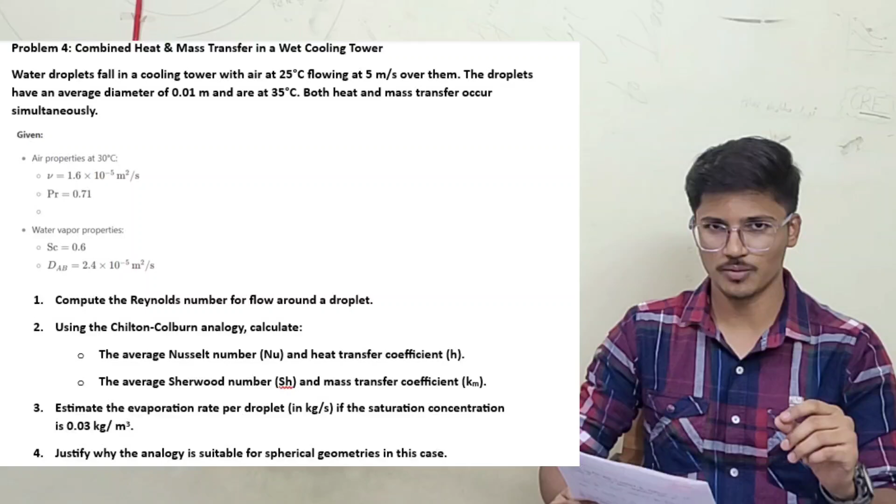So we'll go to part C. In part C, we need to estimate the evaporation rate per droplet. Unit is given to be kg per second, if saturation concentration is 0.03 kg per meter cube. So saturation concentration is given. So the last part of the question is we need to justify why the analogy is suitable for spherical geometries in this case. So these are the four parts which we need to calculate.

So let's look into the solution of the given problem. In this problem, we have to find Reynolds number for flow around a droplet. In the second part, we need to use Chilton-Colburn analogy and calculate average Nusselt number and heat transfer coefficient. Also, we need to find average Sherwood number and mass transfer coefficient. In the third part, we need to find the evaporation rate per droplet. The unit is kg per second and the saturation concentration is 0.03 kg per meter cube. And in the fourth, we need to justify why the analogy is suitable for spherical geometries in this case. So let's start from part 1.

In part 1, we need to compute the Reynolds number for flow around a droplet. So the given data for this part is air velocity, which is given as 5 meter per second. Droplet diameter is given to be 0.01 meter and kinematic viscosity is given to be 1.6 into 10 to the power minus 5 meter square per second. So you are now familiar with the Reynolds number and its formula. Reynolds number is given as U into D divided by kinematic viscosity. Substituting all the given values, we get Reynolds number to be 3125.

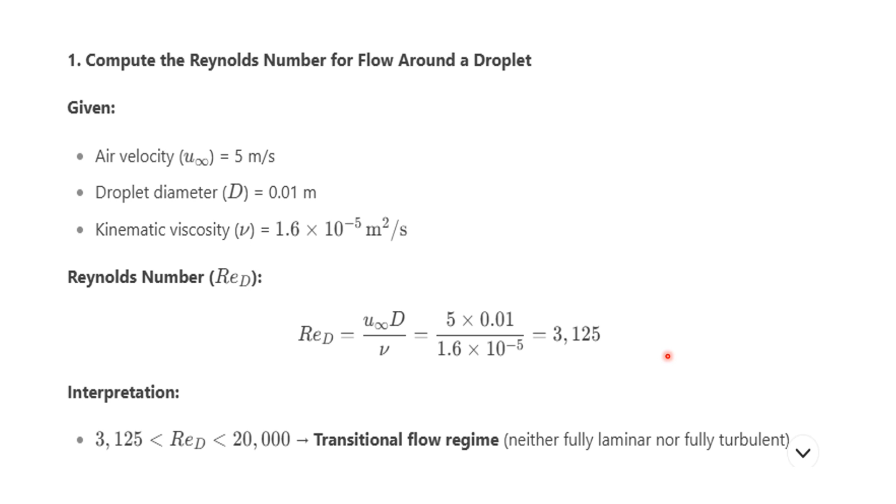Now, as the Reynolds number is between 3125 and 20,000, the flow will be transitional flow. That is, it will be neither fully laminar nor fully turbulent. This type of flow is called transitional flow regime. So this is basically an overall idea of part 1. So let's move to the next part.

In the next part, we need to calculate Nusselt number and heat transfer coefficient. So first of all, in this part, we need to use Chilton-Colburn analogy for heat transfer. You all are familiar as we have derived this formula. So the formula goes as Stanton number for heat transfer multiplied by Prandtl number to the power 2 by 3 is equal to f by 2. Here f is nothing but friction factor. Now we have introduced a new correlation, that is Ranz-Marshall correlation, and this is basically for spheres.

The formula is Nusselt number equals 2 plus 0.6 multiplied by Reynolds number to the power 1/2 multiplied by Prandtl number to the power 1/3. Now, Reynolds number we have found in part A. Prandtl number is given in the question, which is 0.71.

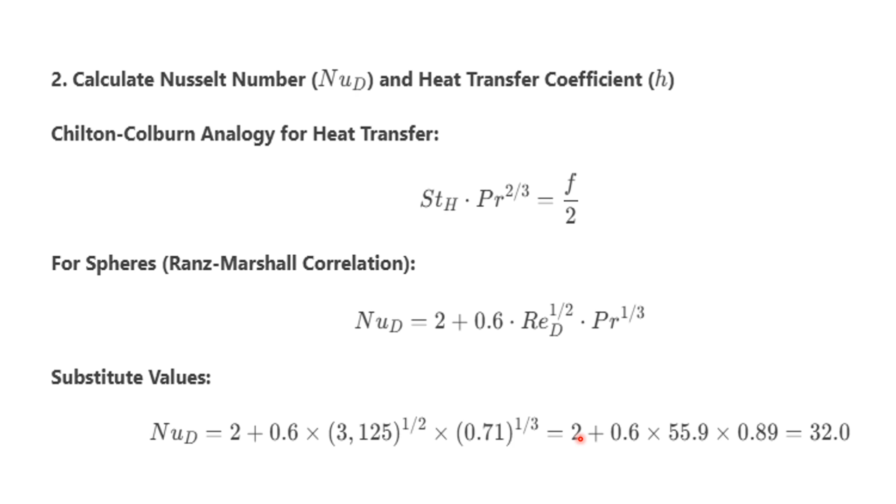So substituting all the values, we get Nusselt number as 2 plus 0.6 multiplied by 3125, that is Reynolds number, to the power 1/2, multiplied by Prandtl number, that is 0.71 to the power 1/3, which is equal to 2 plus 0.6 into 55.9 multiplied by 0.89. The final answer for Nusselt number comes out to be 32. So this is the solution for part 2.

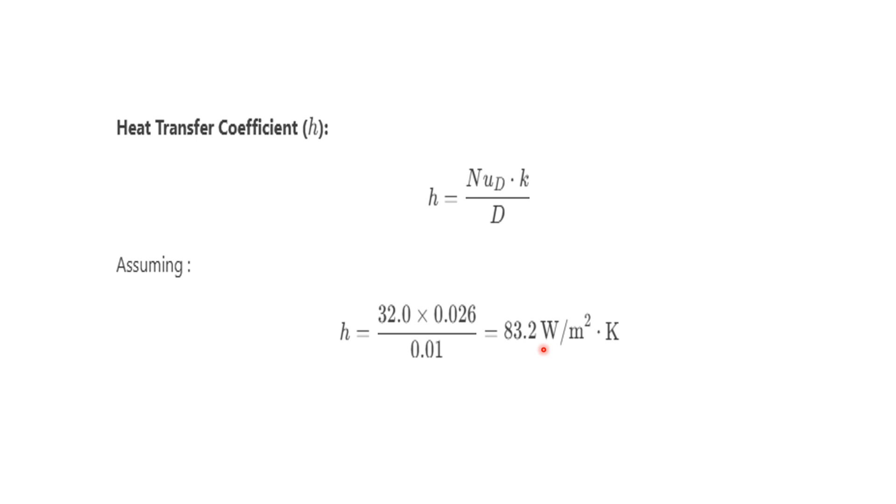Continuing further, we also need to calculate heat transfer coefficient. This formula is very easy. H is equal to Nusselt number multiplied by thermal conductivity divided by diameter. So H equals Nusselt number, as we just found in the previous part, 32, multiplied by thermal conductivity given in the question, which is 0.026, divided by diameter, that is 0.01 meter. So calculating this, we get heat transfer coefficient as 83.2 watt per meter square Kelvin.

Let's move further. In part C, the third part, we need to calculate Sherwood number and mass transfer coefficient, that is Km. So similarly, as we used the Chilton-Colburn analogy for heat transfer, here also we will use the Chilton-Colburn analogy, but for mass transfer. Just a few changes in dimensionless numbers, otherwise the formula remains the same. The formula goes as Stanton number for mass transfer multiplied by Schmidt number to the power 2/3 equals F by 2, where F is the friction factor as before.

Now, the Ranz-Marshall correlation. We have used this correlation in the previous part, and this goes for Sherwood number as 2 plus 0.6 multiplied by Reynolds number to the power 1/2 multiplied by Schmidt number to the power 1/3. Now, we have calculated Reynolds number, and Schmidt number is given in the question.

So we will substitute all these values, and finally we get Sherwood number as 2 plus 0.6 multiplied by Reynolds number, that is 3125 to the power 1/2, multiplied by Schmidt number, that is 0.6 to the power 1/3, and after calculating, we get Sherwood number as 30.2.

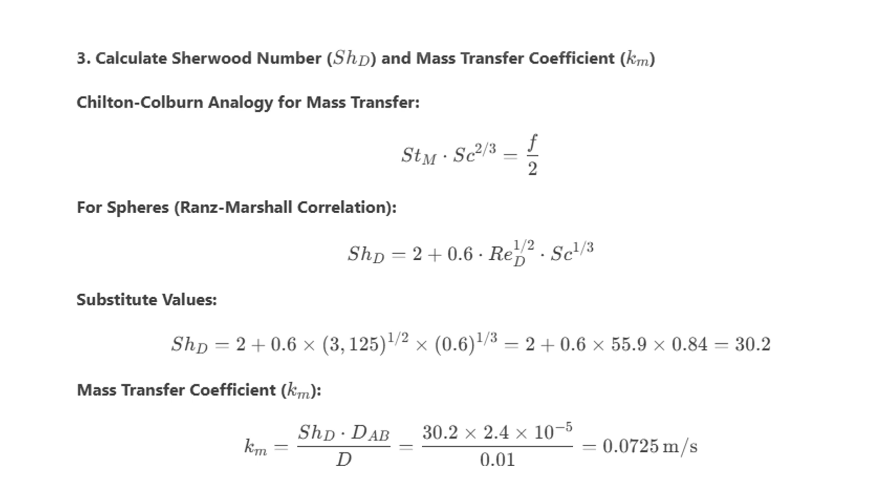Next, we need to calculate mass transfer coefficient. Mass transfer coefficient is given by a simple formula, Sherwood number into diffusivity divided by diameter. Sherwood number we have calculated, 30.2. Diffusivity is given in the question as 2.4 into 10 to the power minus 5, divided by 0.01, that is the diameter in meters. So after calculating this, we get mass transfer coefficient as 0.0725 meter per second. So I hope you are clear until this.

Next, the fourth part is to estimate evaporation rate per droplet. Here, the given data is that saturation concentration, Cs, is 0.03 kg per meter cube. We assume bulk concentration C infinity to be 0 kg per meter cube because of dry air. So now we need to calculate molar flux. Molar flux is given as Km multiplied by Cs minus C infinity. Cs is the saturation concentration, and C infinity is the bulk concentration.

Now Km we found to be 0.0725, multiplied by 0.03. This comes out to be 2.175 into 10 to the power minus 3 kg per meter square second. Be careful of the units. If you don't write units, there is no sense in solving the question.

Next, we need to calculate surface area of the droplet, denoted by capital A. Surface area is given by pi d square, which is pi into 0.01 square, so the area comes out to be 3.14 multiplied by 10 to the power minus 4 meter square.

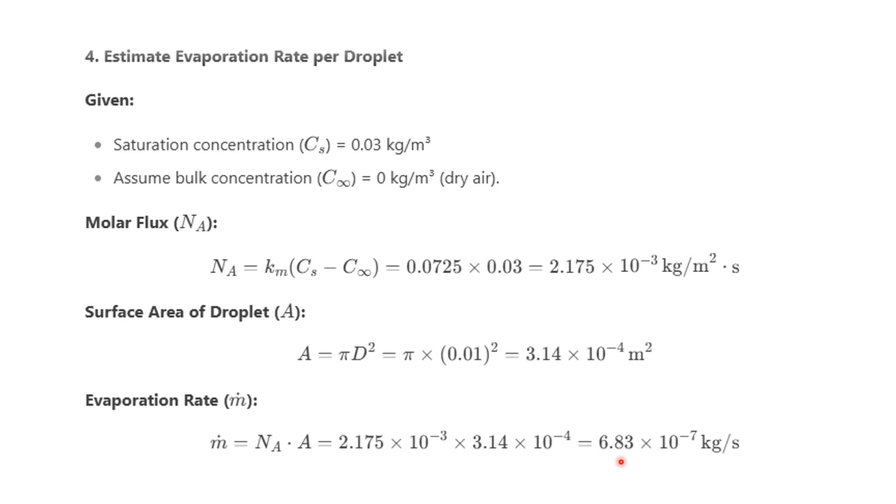Now, after calculating molar flux and surface area of the droplet, we simply calculate evaporation rate by multiplying these two terms, molar flux multiplied by the surface area of the droplet. The final value of evaporation rate comes out to be 6.83 multiplied by 10 to the power minus 7 kg per second. Let's move further.

The last part of the question is why Chilton-Colburn works for spheres. There are 3 points in this solution. The first one is empirical validation, the Ranz-Marshall correlation. This correlation we have used in 2 parts of our question.

That is, Sherwood number is equal to 2 plus 0.6 multiplied by Reynolds number to the power 1/2 multiplied by Schmidt number to the power 1/3. Now this is derived from the experimental data for spheres. So this is the first point. The next point is boundary layer similarity. Heat and mass transfer at the droplet surface follow analogous boundary layer physics.

The last condition or the last point is limitations. Low Reynolds number is dominated by diffusion, that is, Sherwood number is approximately equal to 2, and high Reynolds number, that is, for Reynolds number greater than 20,000, requires turbulence models. Now, the key assumptions that are used in this part: no internal circulation within droplets. That is, there is no internal circulation within the droplets. And the next assumption is negligible radiation and chemical reaction. This means there is no chemical reaction.

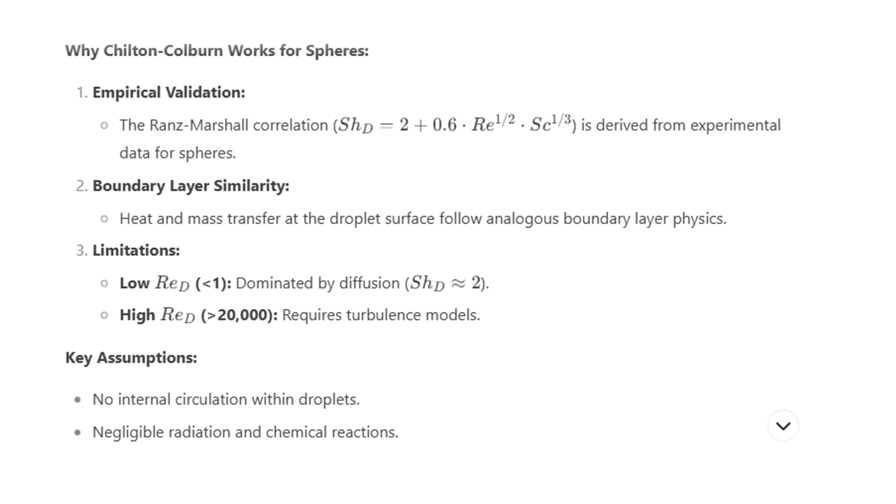Next, the overall summary, that is, key results from all these parts. First we found out Reynolds number. The Reynolds number came out to be 3125 and the flow was neither turbulent nor laminar. It was a transitional flow. Next, we found out Nusselt number, which came out to be 32. We found out heat transfer coefficient, whose value was 83.2 watt per meter square Kelvin. Take care of the units. Next, the dimensionless number was Sherwood number, which came out to be 30.2.

And next we found out mass transfer coefficient, denoted by Km, to be 0.0725 meter per second. And finally we found out evaporation rate, which was flux multiplied by area, which came out to be 6.83 into 10 to the power minus 7 kg per second. So this was the step-by-step analysis of all the 4 parts given in the question. So be very conceptually strong to solve such types of questions, because if you miss any given data or any key concept, you are more likely to make major mistakes. So I hope you understood this question.

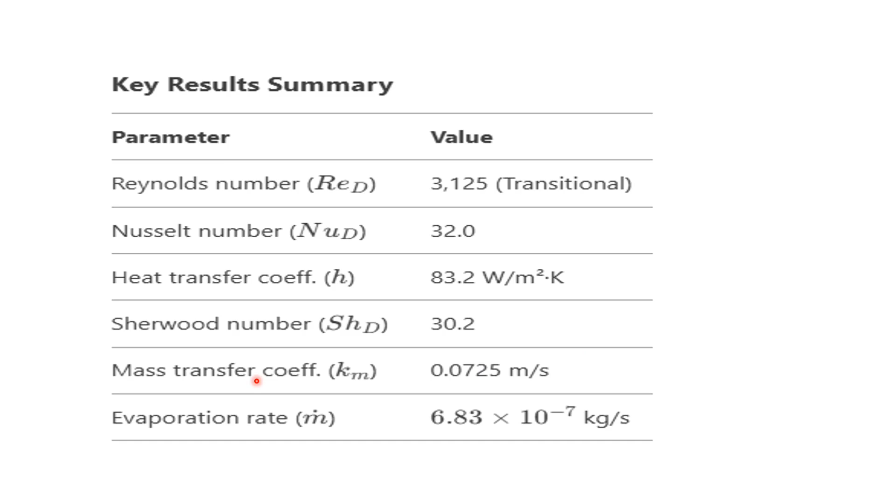So now let's move to our last numerical of this podcast, which is optimizing a chemical plant's air stripping tower. A chemical plant uses an air stripping tower to remove acetone vapor from wastewater. The air is at 25 degrees Celsius and 1 atm, which flows over 0.5 meter by 2 meter wetted plastic plates at 12 meter per second. The acetone concentration at the water-air interface is 0.02 kilomole per meter cube, and the goal is to determine the acetone removal rate per plate in kg per hour.

The given data in this question is air properties. Kinematic viscosity is equal to 1.6 into 10 to the power minus 5 meter square per second. Prandtl number is given as 0.71. Schmidt number for acetone-air is given as 1.8 and the diffusivity is given as 8.2 into 10 to the power minus 6 meter square per second. Also, the plate dimensions are given as length equal to 2 meter and width equal to 0.5 meter.

Now, let us analyze how we are going to answer this question. First of all, we are going to calculate the Reynolds number and determine the flow regime. Next, we are going to calculate the Sherwood number using the Chilton-Colburn analogy, and then we are going to calculate the mass transfer coefficient. So by calculating all these three, we are going to calculate the acetone removal rate. That's all. So, I am sure that you must have understood the problem and all the doubts related to it.

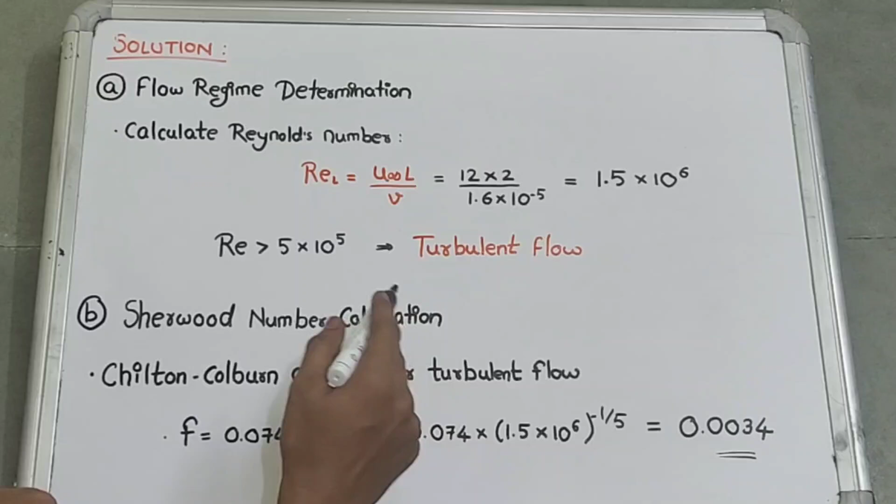So therefore part A gets finished. Now let's look into part B. In part B we need to find the Sherwood number. For that we need to use the Chilton-Colburn analogy for turbulent flow. The formula for the friction factor of turbulent flow is given by 0.074 into Reynolds number power minus 1/5.

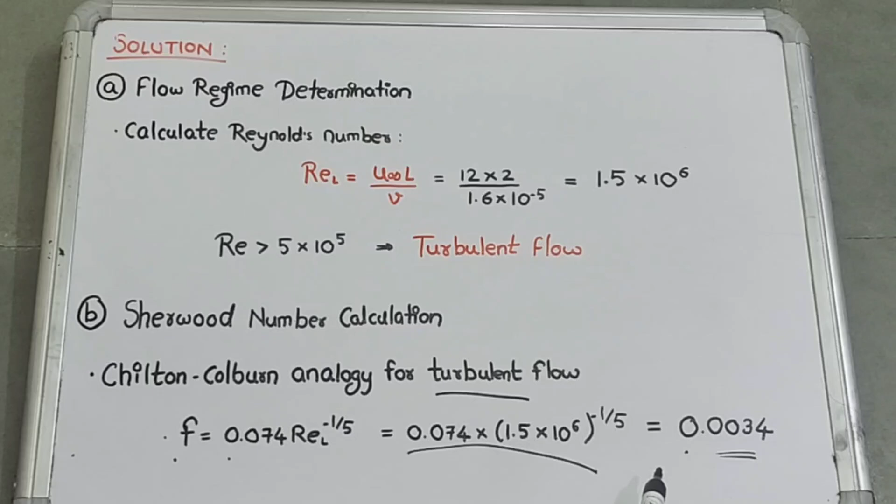Substituting the value of Reynolds number, we get 0.074 into 1.5 into 10 power 6 whole power minus 1/5. Calculating this, we get the final value of friction factor as 0.0034. Now we have found the friction factor, which came out to be 0.0034.

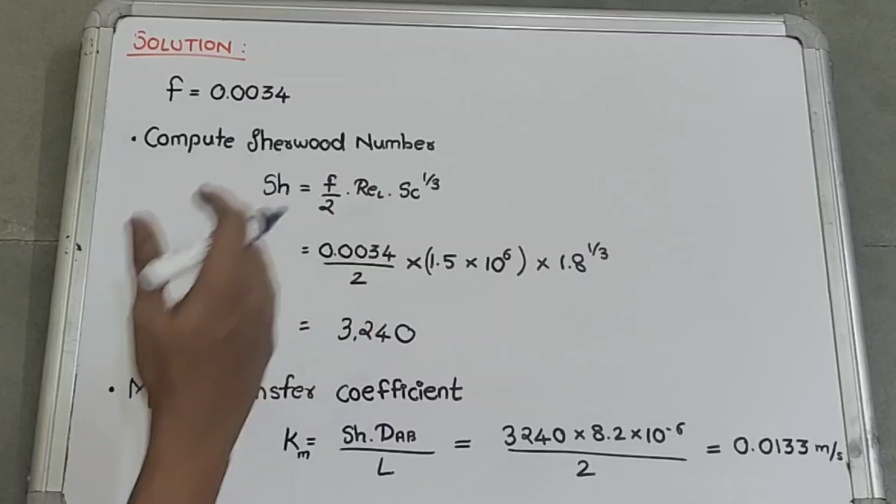Now with the help of the friction factor we find the Sherwood number. So we compute the Sherwood number by the formula: Sherwood number is friction factor divided by 2 into Reynolds number multiplied by Schmidt number power 1/3. Substituting all the values, we get 0.0034 divided by 2 into the Reynolds number which we found in part A, 1.5 into 10 power 6, multiplied by 1.8 power 1/3. Calculating all this, we get the final Sherwood number as 3240.

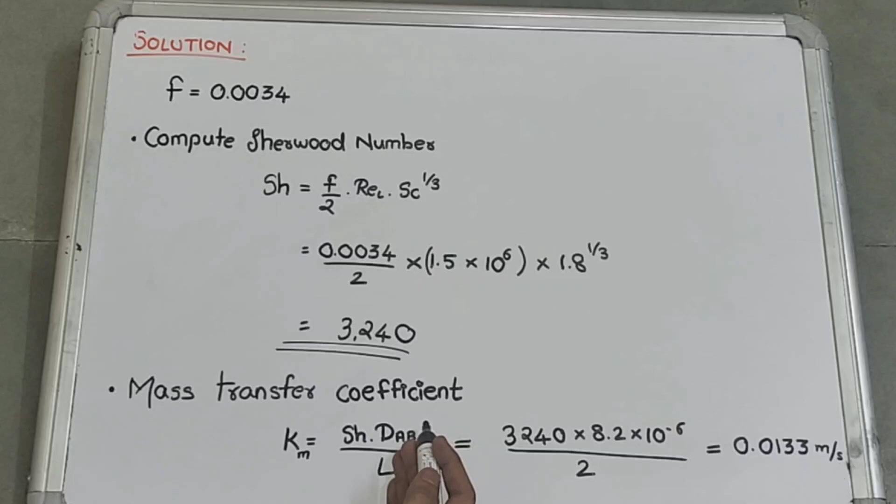Now with the help of the Sherwood number, diffusivity and length, we calculate the mass transfer coefficient. The mass transfer coefficient is the Sherwood number multiplied by diffusivity divided by length. The Sherwood number we just calculated is 3240. Length is given as 2 meters and diffusivity is mentioned in the question as 8.2 into 10 power minus 6. Substituting all the values, we get the mass transfer coefficient as 0.0133 meters per second.

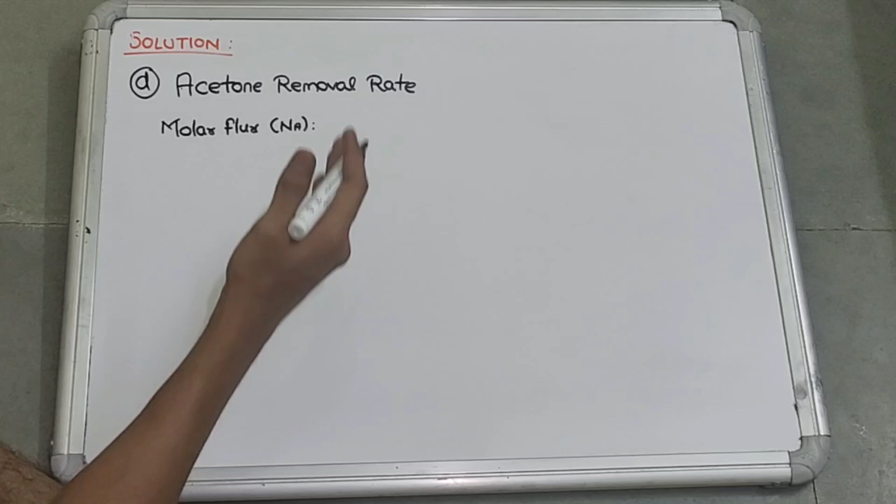So after solving parts A, B and C of the question, we will now move to part D. In part D we need to find the acetone removal rate. In order to find the acetone removal rate, first of all we need to find the molar flux, denoted by Na. The formula for molar flux is Na equals mass transfer coefficient into concentration difference, that is concentration at the surface minus the bulk concentration.

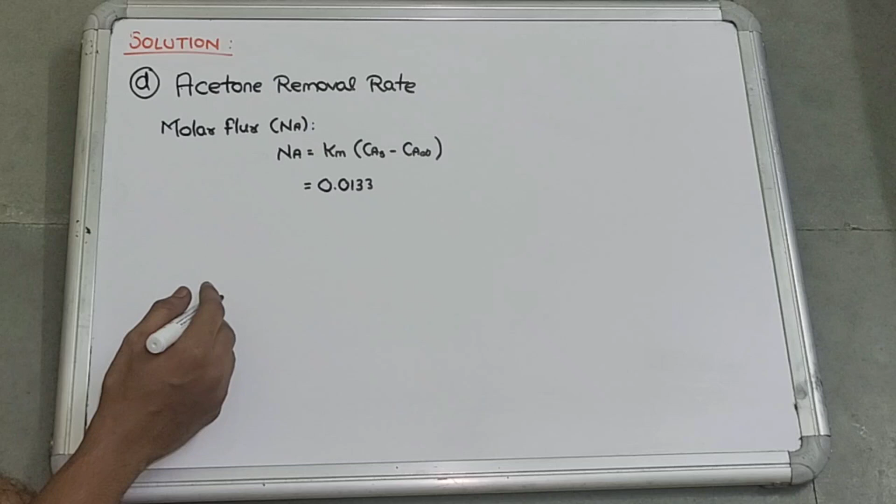Substituting the values, the mass transfer coefficient we calculated in previous parts is 0.0133, multiplied by the concentration at the surface, given to be 0.02, and the bulk concentration is assumed to be 0. Calculating this, we get 2.66 into 10 power minus 4. Now with the help of the molar flux, we find the total rate per plate, which is the solution.

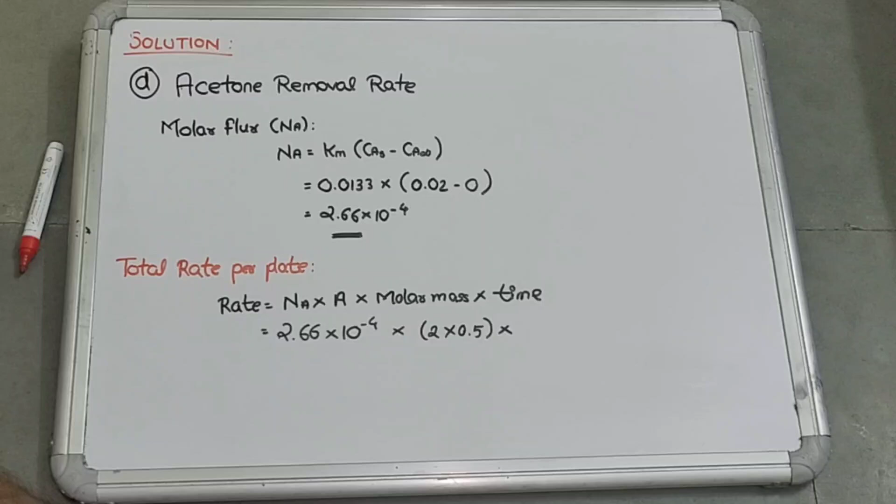Now the formula for finding the rate is Na, that is molar flux, into area into molar mass multiplied by time. According to the given data, the molar flux is calculated to be 2.66 into 10 power minus 4. Area is given to be 2 into 0.5 square meters. Molar mass is given in the question as 58.08 kg per kilomole. And the time is given as 3600 seconds.

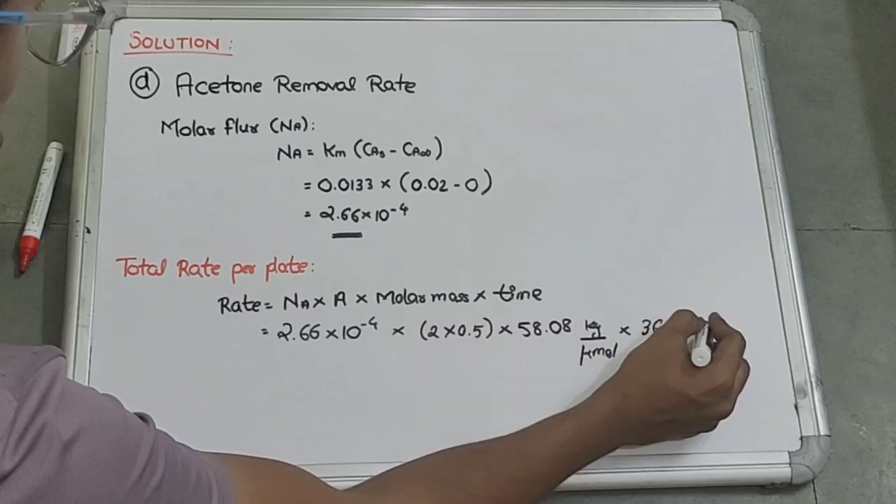That is 1 hour. So, substituting all these values, we get the final answer for the total rate per plate to be 55.6 kg per hour. So, this is the total rate per plate which we needed to find, and we have calculated it in part D of the question.

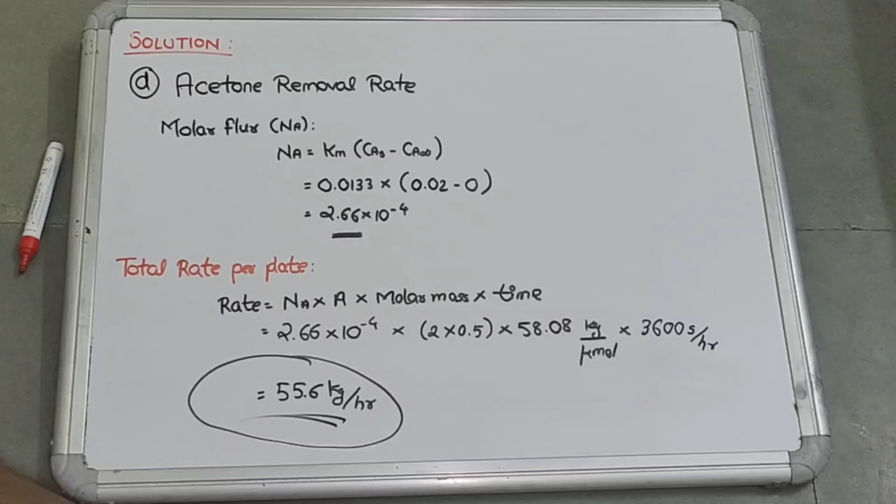So, as we have come to the end of our podcast, let's take a moment to reflect on the importance of what we have covered and conclude. The topics covered are the Reynolds analogy, the Chilton-Colburn analogy, and numericals based on these two analogies. We also saw the physical interpretation of friction factor, heat transfer coefficient, and mass transfer coefficient before deriving these two analogies. We saw how Osborne Reynolds derived the Reynolds analogy using the connection between heat and momentum transfer. We also saw the Chilton-Colburn analogy's expression and derivation.

We also saw the parameters related to these two analogies, such as Nusselt number, Sherwood number, friction factor and other terms. So to summarize, in this podcast we explored two fundamental analogies that bridge the gap between momentum, heat and mass transfer: the Reynolds analogy and the Chilton-Colburn analogy. Whether you are designing a heat exchanger, optimizing a reactor or modeling a cooling system, these analogies provide a solid starting point. They show how deep the connections run between seemingly different physical phenomena. Thank you.